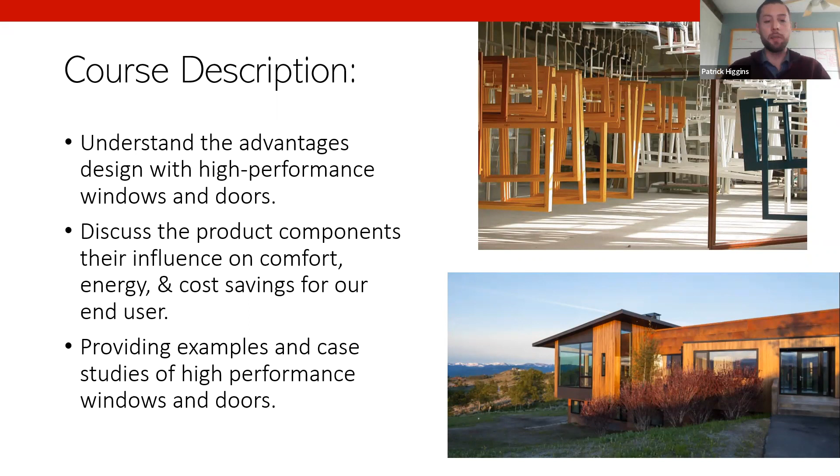All right, so today we're going to learn a couple of advantages of designing with a high performance window and door package. We're going to discuss and get into the nitty gritty of the components, how they influence comfort, energy, cost savings. And then we're going to finish up early with a couple of case studies, and we're going to take a look at some actual real life applications, some learning things that we had learned through our experience in installing and providing high performance products.

A couple of examples of some high performance projects that we have worked on, couple local, couple outside.

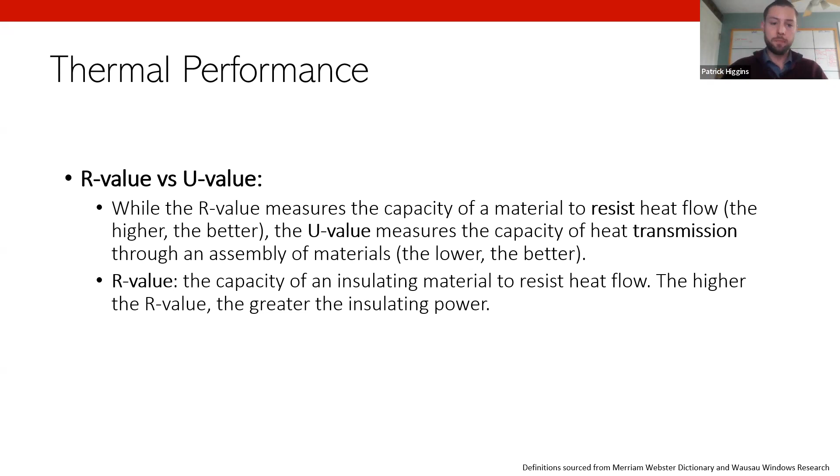Getting into high performance, the most bottom basic threshold that we can speak to is performance. So many people will be very familiar with an R value. Traditionally, when we're speaking about windows, we will use the term a U value. A U value is essentially the same as an R value. It's just inversed. So traditionally, we're used to an R value that is very high, being highly efficient. Conversely, a U value being very, very low will be higher efficiency. So the lower the U value, the less thermal transmission and the better that your product is going to be.

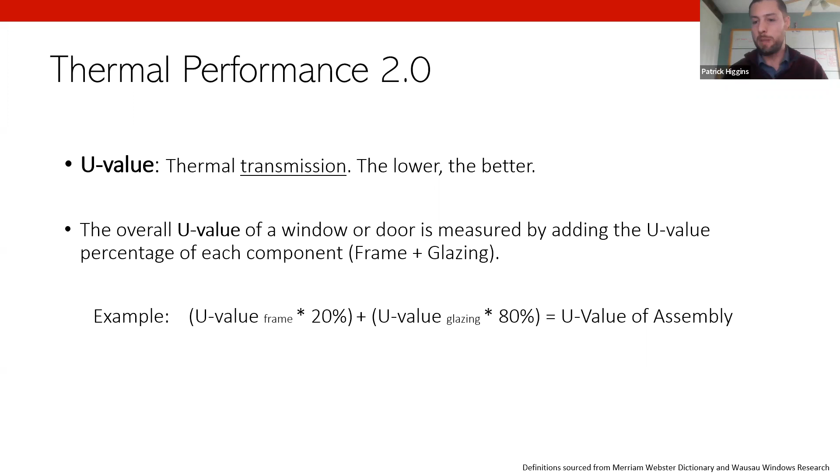There is a very simple mechanism to translate U value into R value, or conversely, R value into U value. If you would like to stay after the class, we can do some math exercises, and I'd be happy to go through that with you.

Getting into insulation and energy efficiency, I like this example. It's not a complete apples-to-apples comparison, but it gives a good idea of how an assembly that's almost identical can perform slightly differently. Looking at this red box, you see a fixed unit with grids and an operable unit with grids. The U value for the frame is exactly the same on both units, and the glazing unit and argon gap are exactly the same. However, due to the change in frame-to-glass ratio, the operable unit has more frame and the fixed has more glass, so the U value is slightly different. This indicates the glass is the higher performing part of this high performance window package, so the more glass you have, the higher performing your window or door will be.

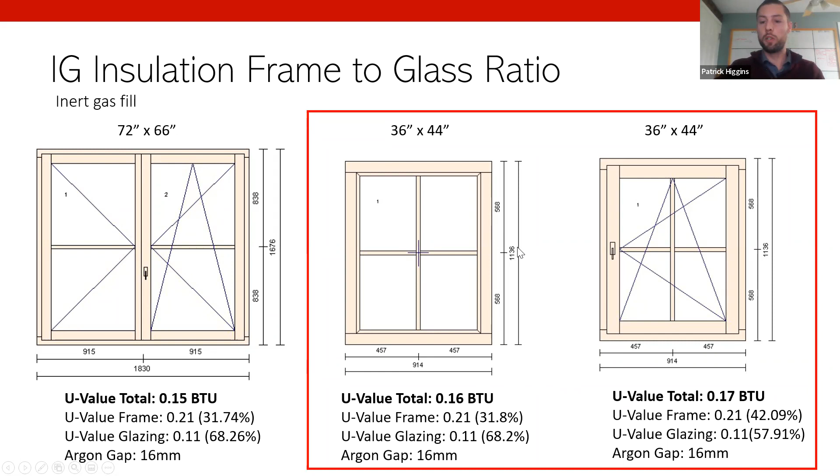Speaking more about glazing performance, I like this slide because we're all in New England, so we've seen single pane glass. Hopefully we're living in homes with double or triple pane glazing, but this is a neat and relatable application. In this instance, it's 14 degrees outside. With a single pane of glass separating outside and inside, right up against that glass it's about 29 degrees. With a double pane, still 14 degrees outside, it's about 48 degrees. With a triple pane, still 14 degrees outside, it's a comfortable 64 degrees. This assumes your thermostat is set at 69 to 70 degrees inside.

The reason I bring this up is that using a high energy efficient, high performing glass package not only saves on energy efficiency, but allows the occupants of your building to get the most out of their livable space. We've all been in a building with single pane glass or poor performing double pane glass, where you have a couch or seat right up next to the glass.

Some of you may work in an office with a single pane piece of glass, or old wood, iron, or steel windows, and that corner office is really cold. It's 14 degrees outside, you're in your office throwing on a sweatshirt or gloves because it's so cold in that space. It's not a functional space at that point - you're cold, it's drafty, and it's not a fun place to spend time.

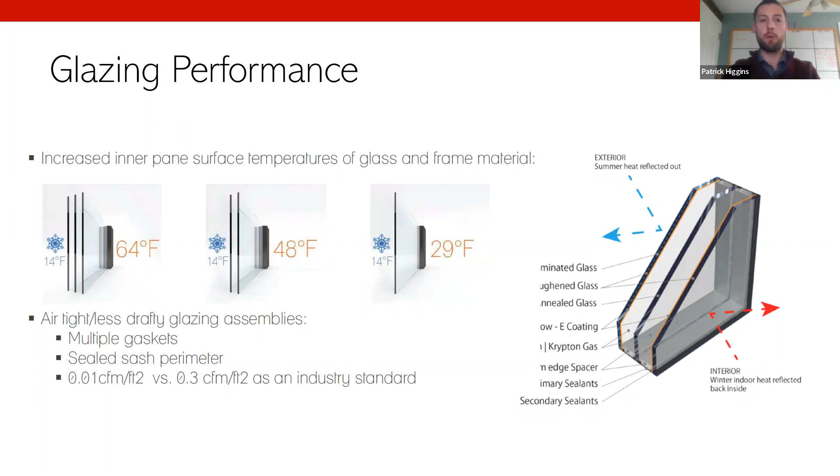Two things are happening here. Anytime you're within a room that has a temperature difference of 6 degrees or greater within that single room, you create what is called a convection loop.

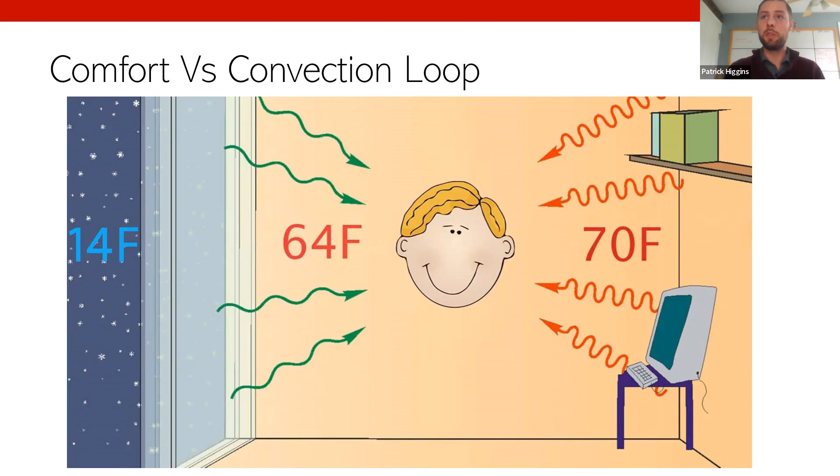So what I like to tell clients is design what you love to design. Design with your heart, and then let the professionals figure out the equation of how to balance it and make it energy efficient. We can still make a passive house or a very highly efficient building utilizing floor to ceiling window walls. We don't have to use the old 70% building siding and 30% glazing—we can now blend that into 50-50 or even greater with a high performance window and door package. So your design is basically whatever you can think of, and implementing a high performance window and door package can make that design a reality without sacrificing efficiency or comfortability.

This really exemplifies the fact that we don't have to sacrifice the design or glazing area for performance. If any of you would like to walk this project with me, I'm very happy to, and we can talk more about it in person.

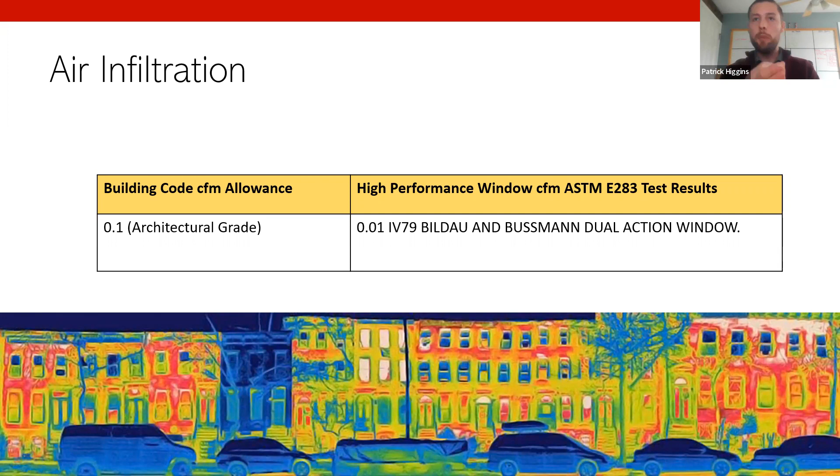We can also tell that these windows have been replaced because these are probably more modern double pane glazing, and keeping to the historical needs of the location, this is probably single pane glazing where they're red or even white. Very interesting. A thermal image can tell a tale that may not be seen by the naked eye. We can locate air infiltration, see high performance windows versus single and double pane windows, and see replacement windows all within one picture.

So speaking to air infiltration, the traditional North American view is using silicones or sealants to seal your building envelope, utilizing old school methods of Tyvek or Typar type building wraps. The future of high energy, high performance buildings and window fenestrations is using a vapor open, peel and stick applied facade - this goes more to a passive house type approach. That does a couple of things: one, it allows for very quick and easy quality control. Two, we've all seen and driven by construction sites where we see the Typar or Tyvek building wrap flapping in the breeze as it's tearing itself off the building.

So it ensures it sticks and stays on the building with a nice airtight seal. If we're utilizing a very high performance window and door package, we'd generally prefer to use a taping system. A taping system has been used in Europe for 50 to 70 years with proven results. In North America, we usually use sealants, which typically tend to crack and have to be replaced within 15 to 20 years - that's the usual life expectancy of a sealant. So not just speaking to air infiltration, but also to longevity of products we choose. If we can use a tape product, fast and easy to install, we can improve air infiltration while also reducing overall maintenance costs of the structure.

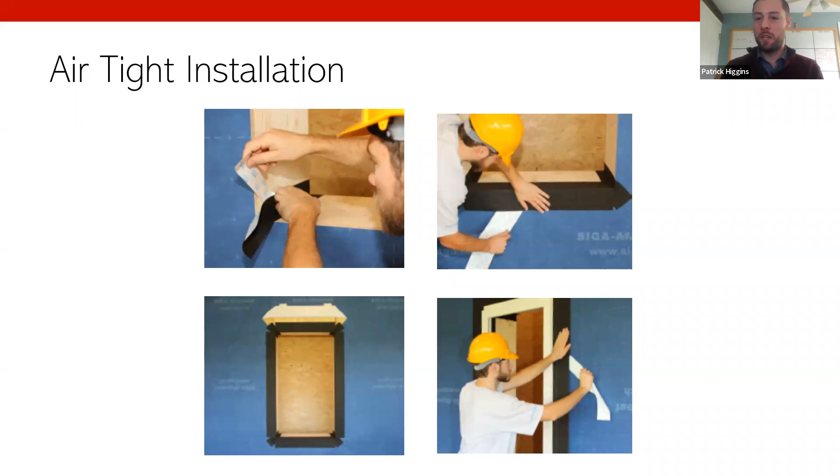So moving on a little bit from air infiltration, still speaking to a high performance window and door package. As I mentioned opening this presentation, my view of high performance windows and doors isn't just about energy efficiency, but also the comfortability of living in the structure. We've all been outside and had road work in front of our building, we've all heard jets or loud trucks rumble by our house. Part of having a high energy efficiency or high performance window package is eliminating air infiltration.

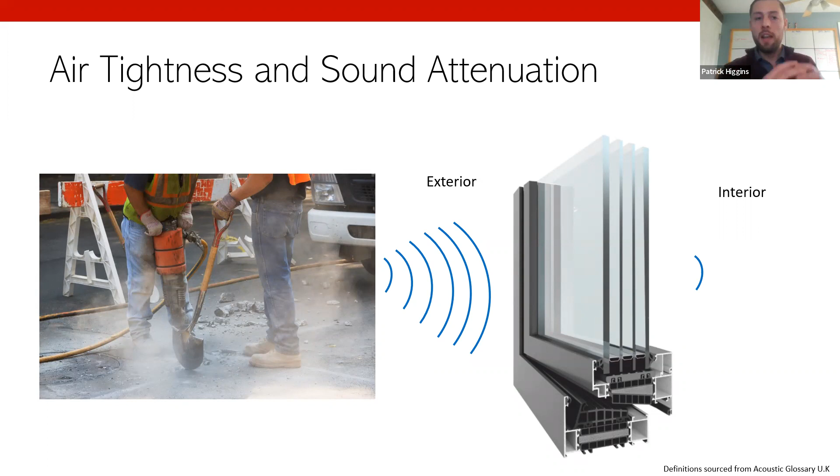Now, we had just spoken to air tightness and air infiltration being very, very low in these high performance packages. Sound travels exceptionally well through air. If we can eliminate air infiltration, we can very much reduce ambient noise from outside. So having these very airtight assemblies is a double win, so to speak - not only are you improving on energy efficiency and comfortability, but also reducing sound transmission at the same time.

There's two schools of thought when we're measuring sound: there's the STC value and there's the OITC value. They are both basically relaying the same exact information - some say tomato, some say tomato. Two methods of measuring sound, but still relaying the same information. The higher the value of your STC or OITC, the less sound infiltration.

Now, the main difference between an STC value and an OITC value is where they start measuring sound infiltration. Your STC value is an old school rating system designed in the mid 60s to measure things such as radios or televisions or other mechanical equipment. They start their measuring system at 125 hertz. The OITC system was designed to measure railroads, aircrafts, and lower type frequencies, starting at around 80 hertz. So your OITC value is a little bit better at relaying the information than the STC value. It was designed specifically for building practices, whereas the STC value was designed more for common use.

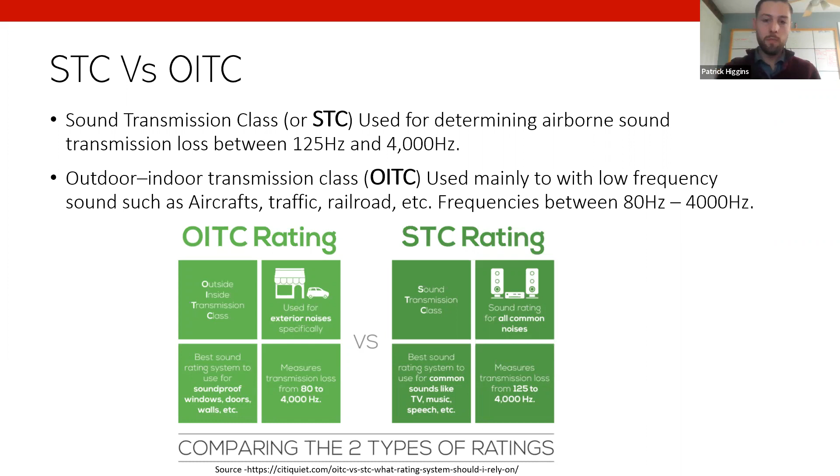Speaking to sound infiltration, we're going to open this up to a discussion. Three main sources of sound infiltration in the buildings we live in and occupy today: air traffic, rail traffic, and highway traffic.

I'm going to open it up, we'll go around the horn. I want everyone to give me an answer. I'm going to ask which one of these three do you believe is the most difficult sound to abate, meaning what is the most difficult sound for us to eliminate in our structure. I'll start with Alex because Alex is the one I can see.

I'm going to say air. Okay, do you have a reason? Just because it's really loud. Perfect, I'm not grilling you, I'm just asking because we're going to have an open discussion about this.

Chris. I'm going to go for highway because it's a lower decibel, it's lower frequency.

Okay Lisa, we'll just do a couple more, or if anyone else wants to jump in. This is Dre - I would say it's the rail traffic because it's intermittent, so it'll come rumbling along. I've run into this before.

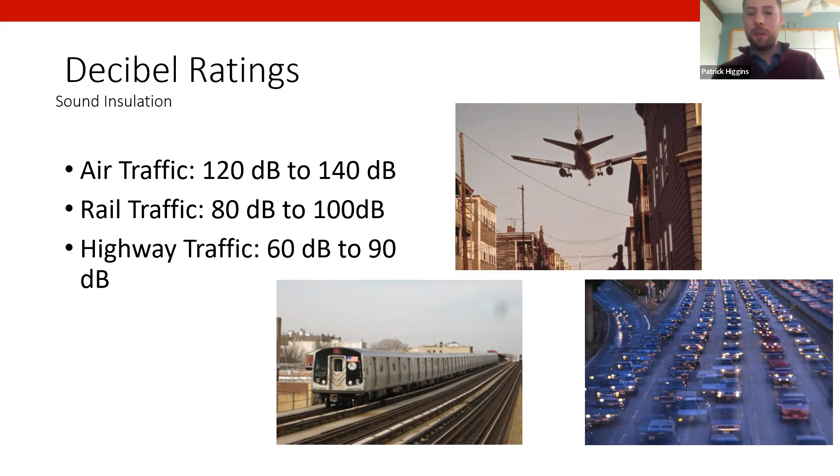So how can we add value to a property? We can simply reduce utility bills by utilizing a higher performing package. We can also maximize the living space by having a highly insulated window wall or window assembly, so you can maximize this entire structure for usage.

We can eliminate that air infiltration by using a very airtight window and door package. And as we just spoke to, we can keep those noise disruptions outside by eliminating air infiltration. So, all of the above can give you value to your structure by simply utilizing a high performance package.

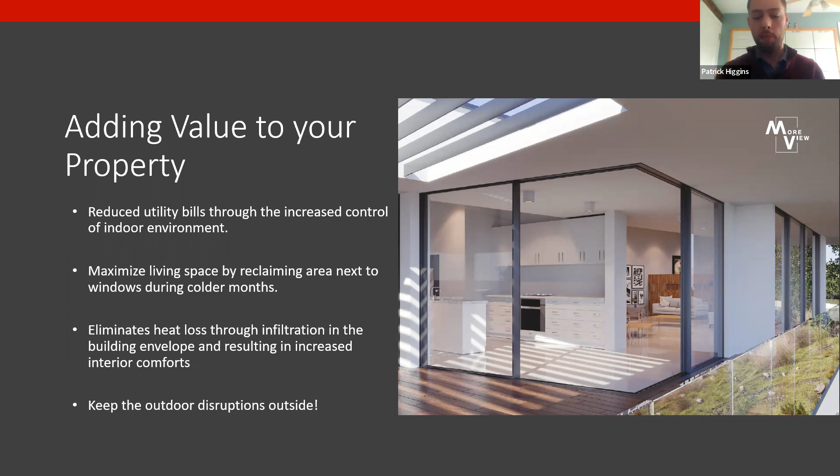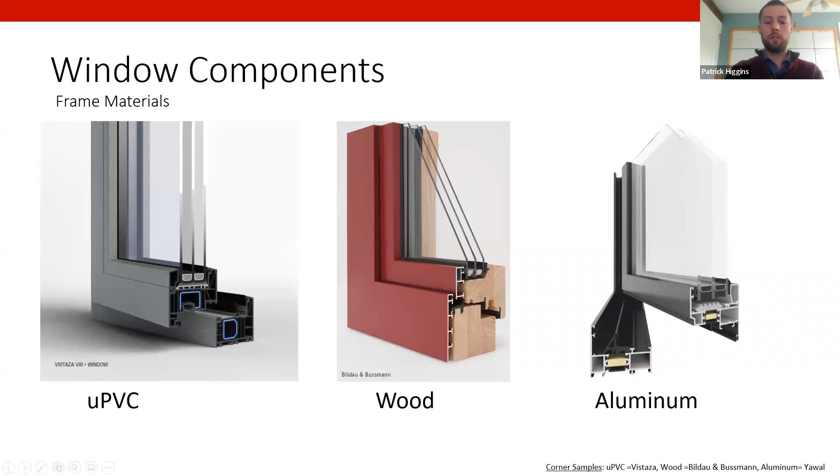A couple of examples of some high performance windows in this slide here.

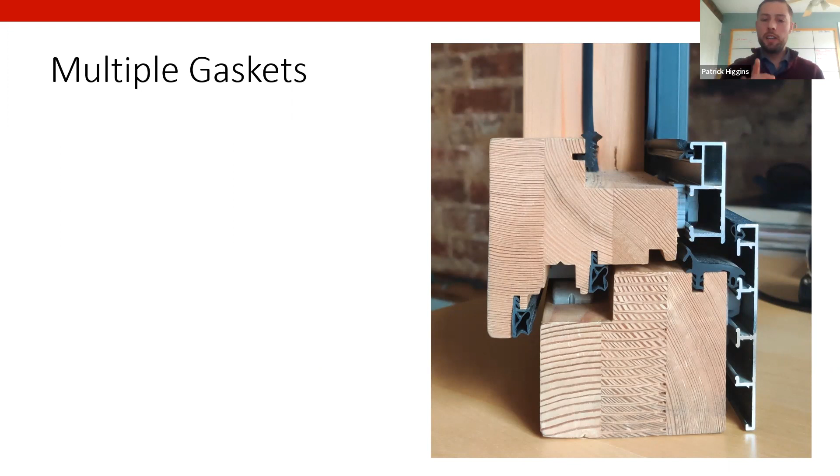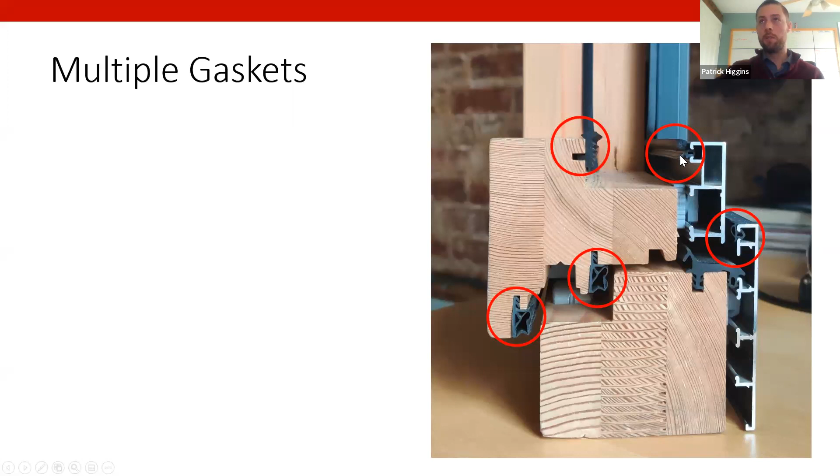To achieve high energy efficiency and very low air infiltration, as you can see in this slide, multiple gasketing systems will reduce airflow. In this particular instance, you have 1, 2, 3, and I'd argue even 4 EPDM rubber gaskets, eliminating air while also eliminating water infiltration. You may also notice you can have double gasketing in your glazing pocket, or if you choose, you can also put sealant in this location.

You may also notice in this picture on the right-hand side that we eliminate thermal bridging, or infiltration of unconditioned space. By alternating the grain of the wood in different directions, it makes it more difficult for ambient temperature to thermally transfer through this profile, simply by alternating wood grain.

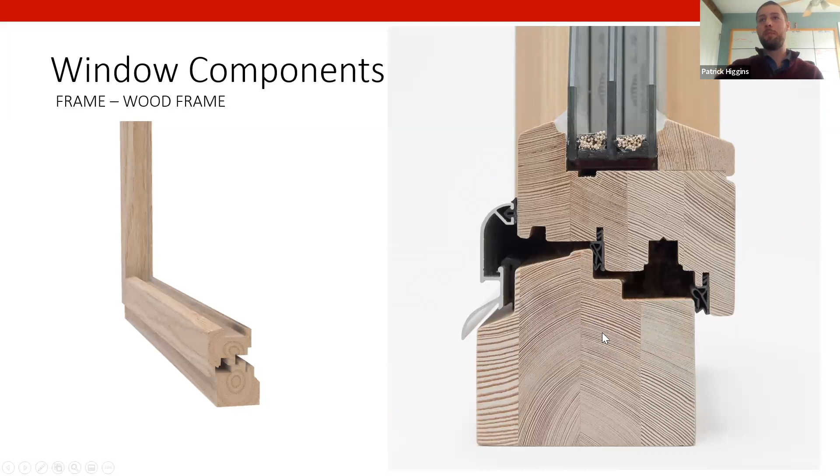Or if you're using an aluminum structure, you can use a thermal break, and we'll get to that a little bit later. So some of the components we use to get this high energy efficient window and door package is an insulated glazing unit.

We can use argon, the traditional method for insulating between the glass. Or if you're looking for something very high energy, we can also insert krypton, another noble gas that offers very high energy efficiency. I'll note that krypton's insulation property is much higher, but it also carries a much higher cost—it's a much more difficult natural material to manufacture.

We're also going to utilize what's called a warm Swiss edge spacer bar. This eliminates thermal bridging—thermal bridging being the transfer of ambient temperature from the exterior to the interior. Imagine a piece of aluminum, which we know is very thermally conductive—it will carry that cold or warm from outside through the glass, through the spacer bar, through the glass, and into your structure. If you're using a warm Swiss edge spacer, it's a composite material stuffed with desiccant.

Desiccant is a material you may find if you've purchased a new leather good, running sneakers, or other materials where they don't want water present. Desiccant will absorb water, and as it absorbs, it will also expand. So in this particular instance, you have a butyl surrounding this spacer bar, and if there is any air infiltration, there's always a small ambient amount of vapor in air, which will cause the desiccant to expand and thus self-heal this window.

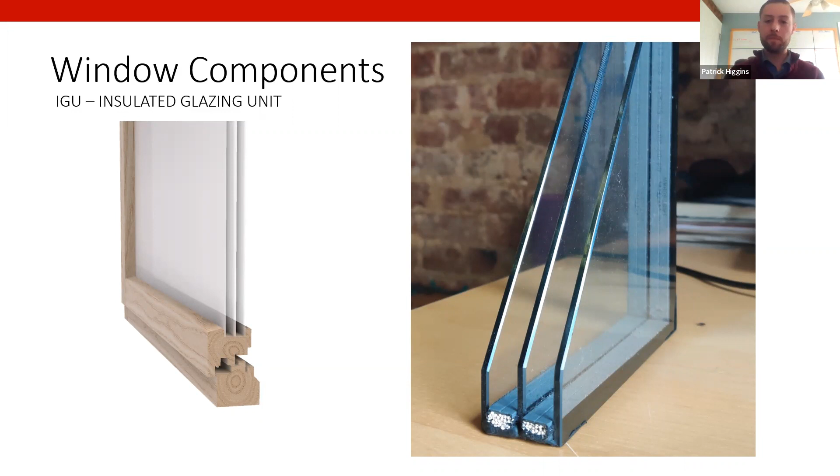So a couple of things we can utilize: low-E coatings, as I mentioned, argon and krypton gas fills. We can use low-E coatings to either take advantage of solar heat gain or to shade solar heat gain, depending upon how you build and design the heating and cooling loads of your structure. We can do this with tempered glass, laminated glass, or even specialty glazing, like a privacy glazing type, where you could flip a switch, add energy, and actually dim or cloud your piece of glass. We do have that technology available.

Utilizing a composite material for your spacer bar, not aluminum or stainless steel, although stainless steel does perform a little better than aluminum. But utilizing this high performance composite eliminates thermal bridging, and utilizing the desiccant with the butyl edge sealing reduces the amount of argon escaping from your window assembly.

So we have multiple uses. Not only can we do double pane, we can do triple pane. In some cases, I can even do quadruple pane if you're looking for hyper energy efficiency. We can also do triple pane with lamination, so if you're looking for impact resistance, ballistic resistance, or something like privacy glass, we're able to provide that and implement it into a high efficiency, high performing window and glass package.

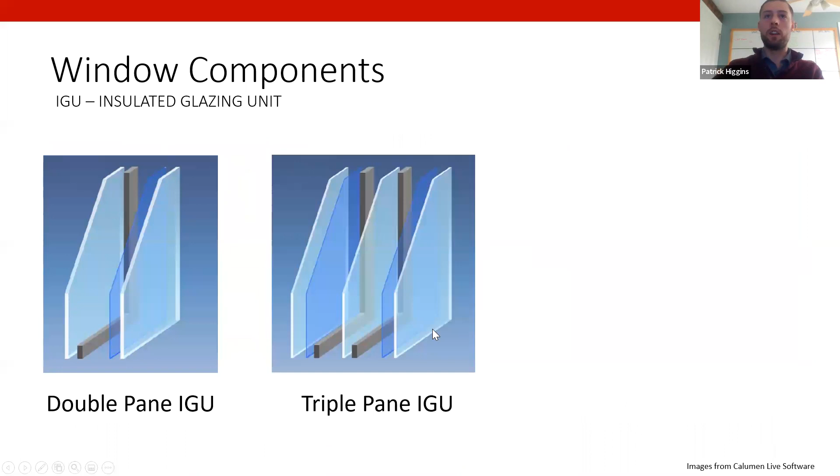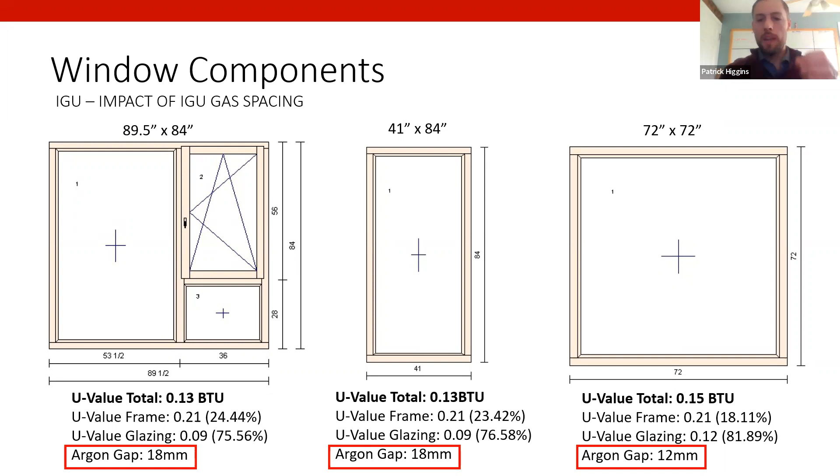So when I say thickness of your spacer bar, this unit right here, if you make it wider, that allows for more argon or insulation to go in. And that argon gap, the wider it is, the more insulation you can put in there and the more efficient your window can be. So without sacrificing design, without sacrificing maybe a wood species or the type of frame you're hoping to implement, you can play around with the spacing of the spacer bar, wider or narrower, to make a higher or lesser performing glass package. It's a way we can maintain design while also adding insulation value.

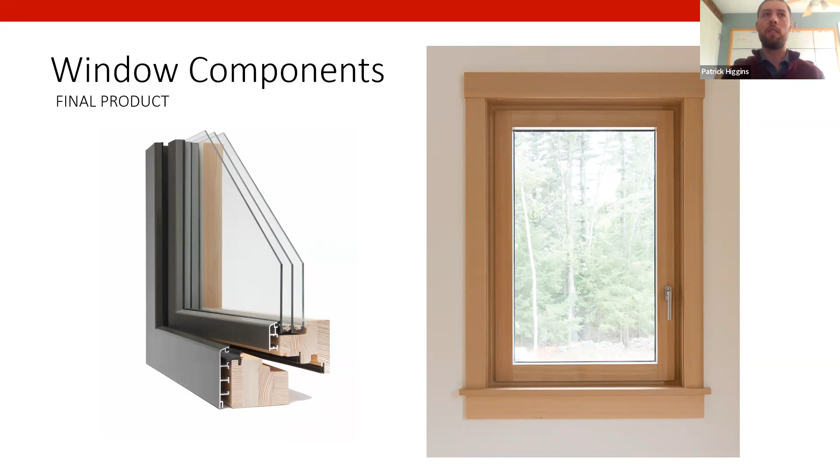So adding all of these components we're speaking to—multiple gaskets, triple pane glass, high energy efficient and thermal bridge free spacer bars—adding all of these together gives you one final product: a high energy, highly efficient window and door package.

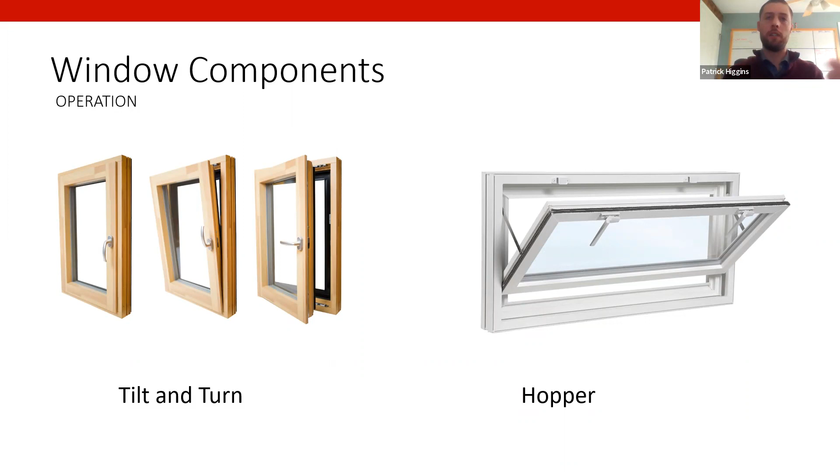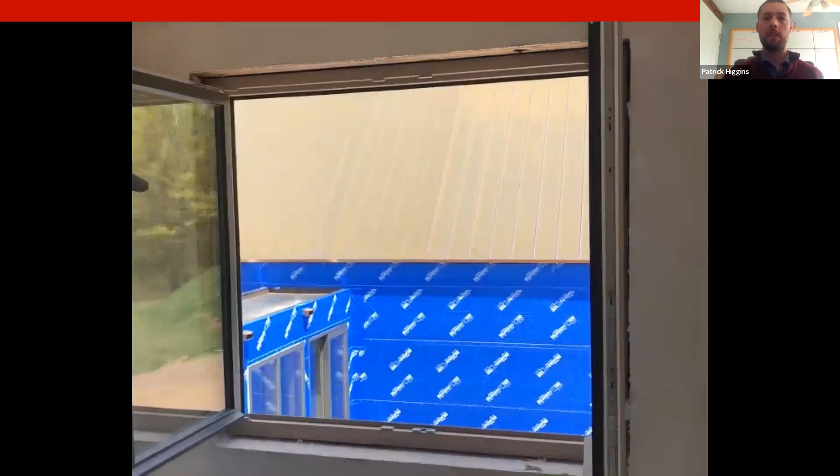And to tie it all together, as I mentioned, there's some Henry Blueskin, a high energy efficient building wrap, in the background.

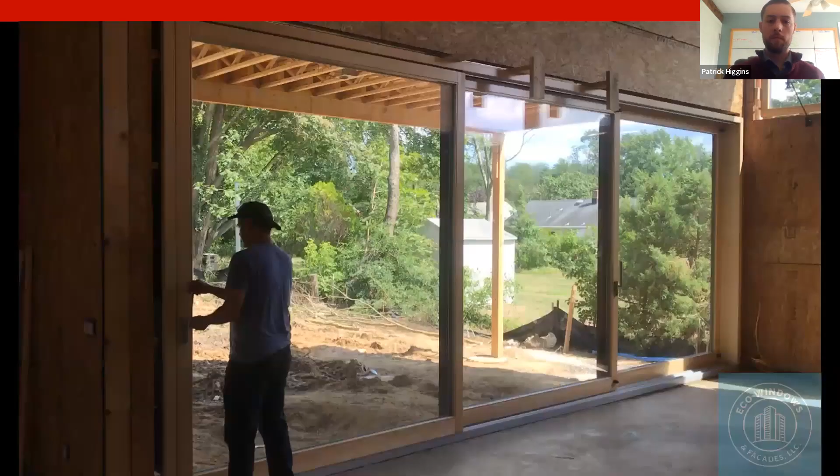As I spoke to earlier, we do not need to sacrifice design or the natural flow of your building to maintain a high performance building or window and door package. In this particular instance, you may notice this is a lift and slide 3-panel door. Two panels are operable. This door is 10 feet tall, 21 feet wide. Each one of those panels is triple pane glass, about 1,000 pounds per sash.

And now right there, Bart Betancourt, our principal and owner, is moving 2,000 pounds of glass very easily for a massively wide and open area that will be the future of this outside living patio. So I can't stress this enough: you can still design exactly how you want and still get an incredibly high performing building.

Hardware is very unique in these high performance windows and doors for two reasons. One, they have to support lots of weight, so stainless steel is almost always being used. That also gives you the double edge that you can utilize these in an ocean environment without worrying about corrosion.

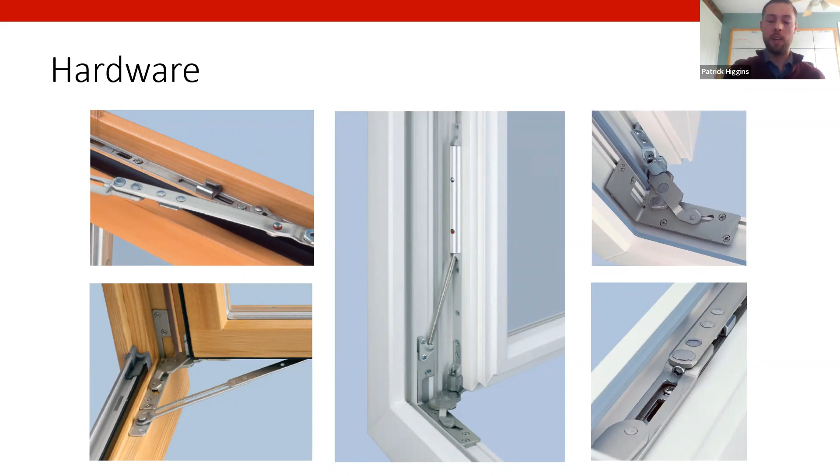Two, because we're looking for very high or very low air infiltration numbers, there are multiple points around this window that lock. Traditionally with a hung window, you have one, maybe two locking points at the meeting rail. With most of these tilt and turn windows, you'll have upwards of four and up to about twelve places where the window will actually lock and engage. That gives you much more security while also compressing the gasketing around the entire perimeter of the window, eliminating air infiltration. That's how we get those really high energy efficient numbers.

Lisa had asked this before we started, but it's worth noting that utilizing a high energy performing product, you don't have to stress about window treatments or blinds at the interior. There's always a solution, and we do offer these solutions as well. We can talk more after the AIA presentation, but even with a high performance window and door package, you can still have interior window and blind treatments that are very functional, with millions of different patterns and combinations.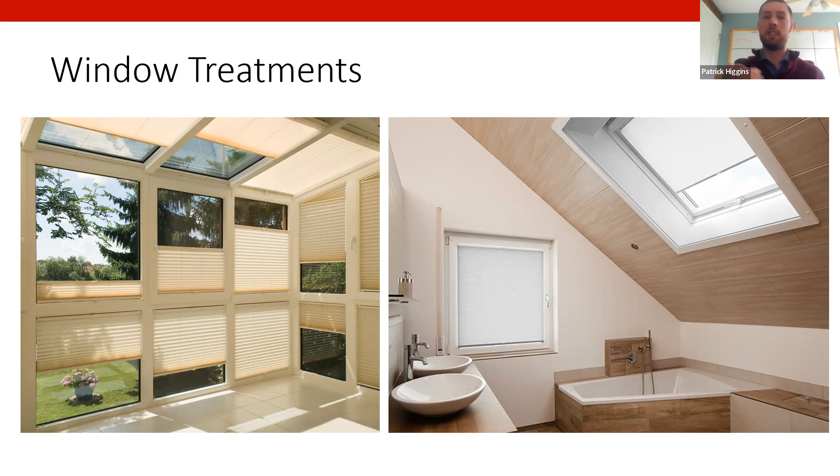Screens in Massachusetts are required for all operable windows, and with an in-swing type product, there's a small bit of logistics that have to happen for a screen. So there are many options: you can have a hinge screen, a snap-on screen from the exterior, a traditional type screen, or even a rolling screen, which seems to be very popular currently.

It gives a very high-end look. It's only engaged when you need it, so you have a clear glass opening. I work with a lot of architects, and as a side note, they always ask me, what is the visual transmission for your screen? I want to look through glass, I don't like seeing screen.

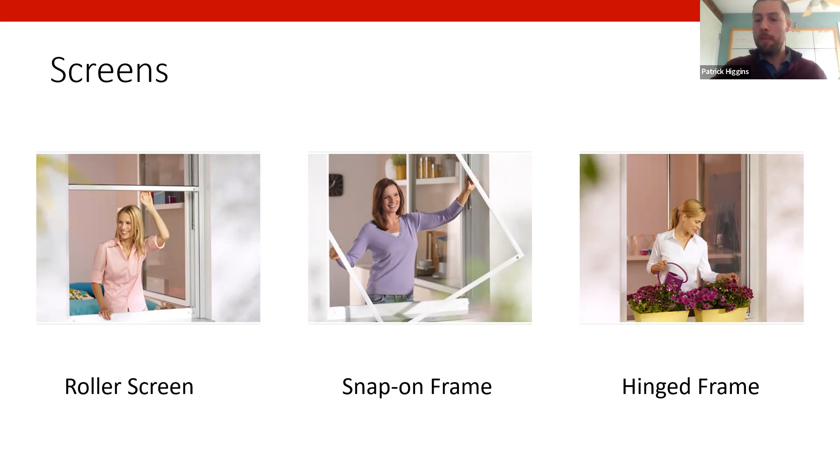The simple solution to that is using a rolling screen cartridge. It's a much higher end look. It can be automated if you want for very large floor to ceiling window and door assemblies, and it allows you to look just through glass all the time, unless your window or door is open, and then you can engage that roller screen.

We can also offer custom made screens for any application you're looking for, matching wood grains with your screen, or you can opt for a traditional aluminum screen.

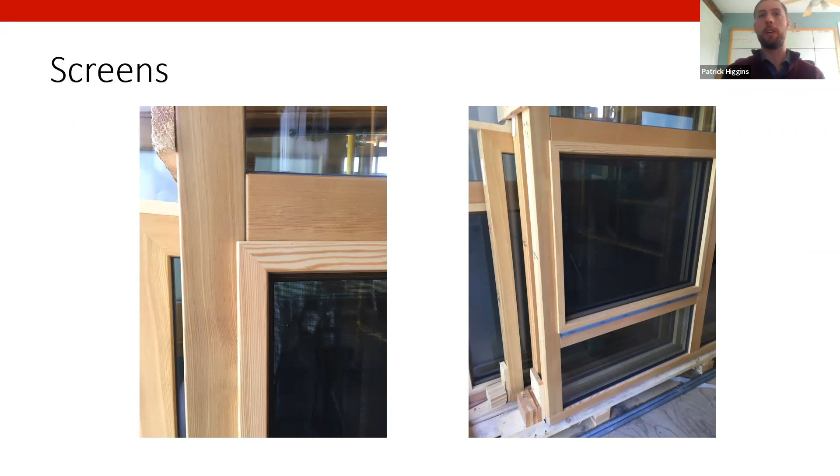Putting all these together gets you a really nice and beautiful final product, a high energy product, energy savings, comfortability, and a nice place to call home. Do I have any questions before I go into a couple of case studies?

A lot of times for renovations, I've heard that maybe triple pane is not really worth the cost. What is your assessment of that? Is it better suited for areas where sound attenuation is more of a goal?

That's a two-part question, so I'll answer the first part. That's a very old school methodology. The implementation of newer technologies allows for less cost delta between double and triple pane glazing. Personally, I see about a 5% difference from double pane to triple pane. When I look at 5% over an entire window package, that's extremely nominal considering the amount of energy savings you're going to get. I've done some personal case studies where I've seen about a 5 to 7 year return on investment in my projects, going from double pane to triple pane. It really becomes a non-starter.

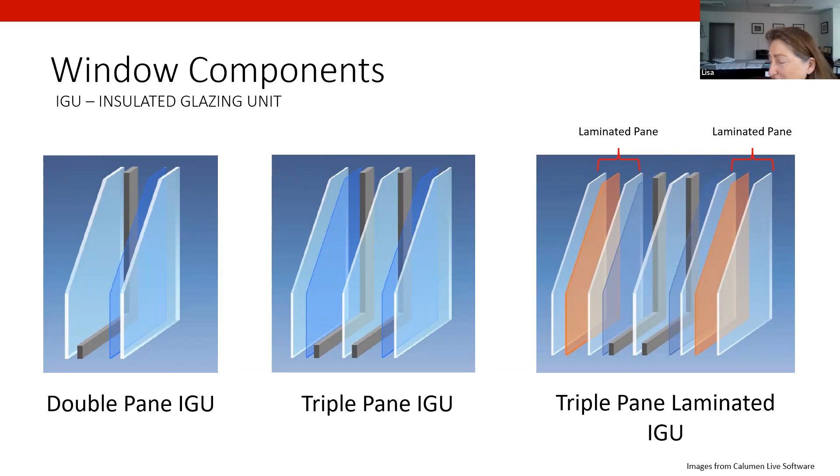A couple of things worth noting here. A high performance window and door package is only going to be as good as its installation. I like to draw the parallel between cars, I'm kind of a car guy. If you're a person that doesn't know how to drive a car or a race car, having a Ferrari probably isn't going to help you all that much. If you don't know how to drive a race car, there's no sense in owning one, right? So utilizing a high performance window is a two-part equation: not only the product itself, but also the installation, ensuring it's installed perfectly, as well as the attention to detail.

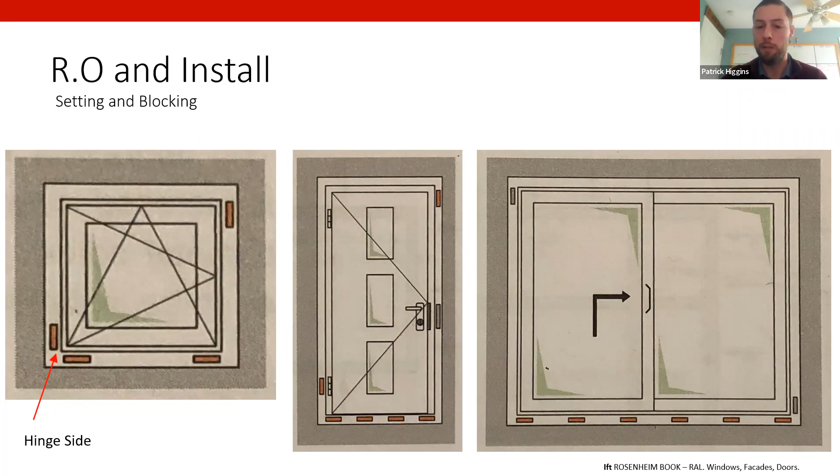We talked about, and Lisa brought up the point, building wraps and types of materials we use to waterproof and reduce air infiltration. Ensuring that we don't have air infiltration is a two-part equation: not only the performance of the product itself, but how we install it within the window cavity and the wall assembly itself. So ensuring we put the proper blocking in the proper locations, or shims in the proper locations, to ensure this window will properly function through its lifespan. Or ensuring that we tape the rough opening and make a nice location for our back taping to be taped to.

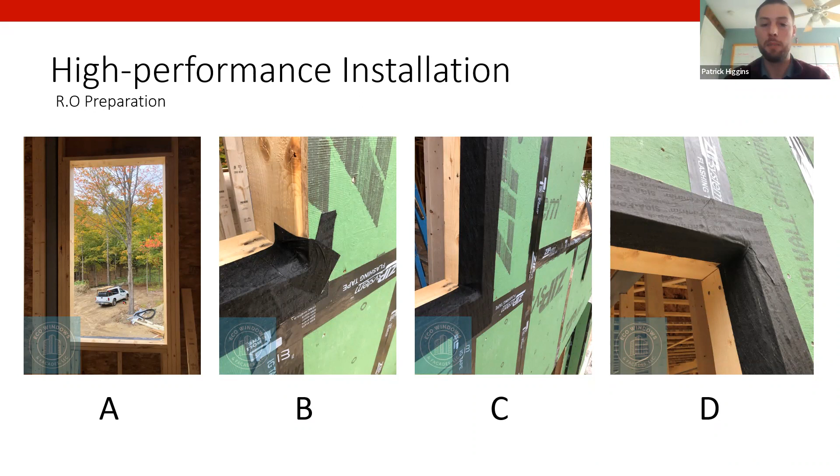Also ensuring that we fasten it properly so it doesn't rack, twist, or turn through its life expectancy. We always say, especially here at Eco Windows and Facades, that the details make a good project a great project.

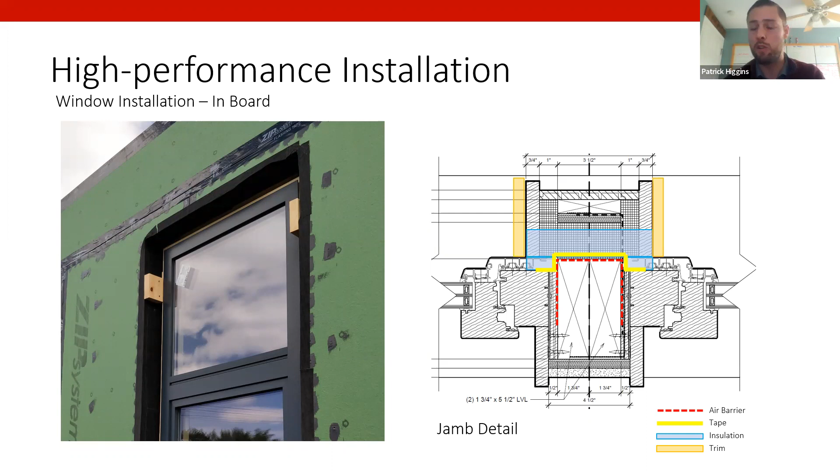Utilizing a high-performance installation method, making sure that we go through the details before we get out into the field. We don't want to have any surprises in the field, because that results in construction delays. So going through the detailing process is something we strive to do to make the best possible product.

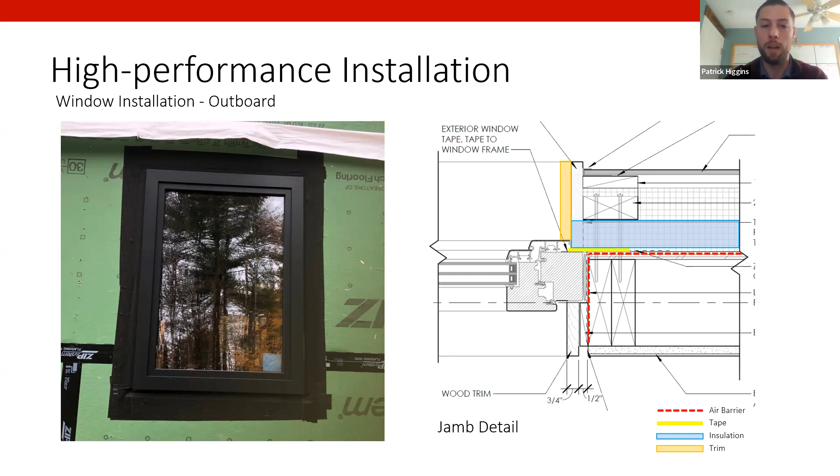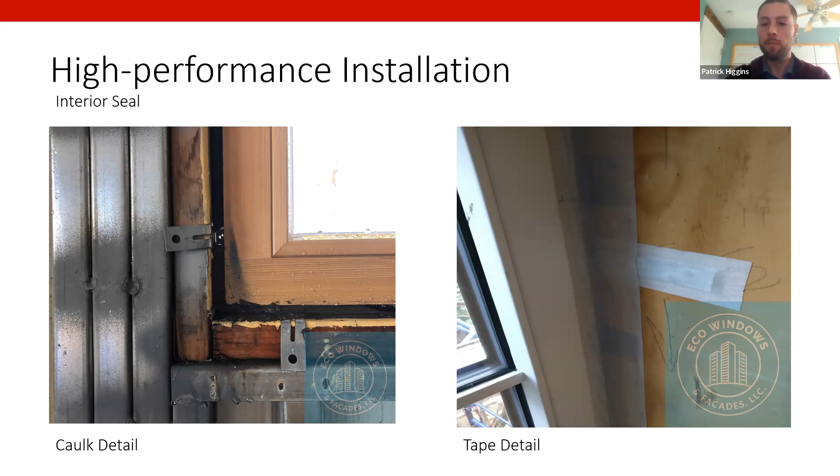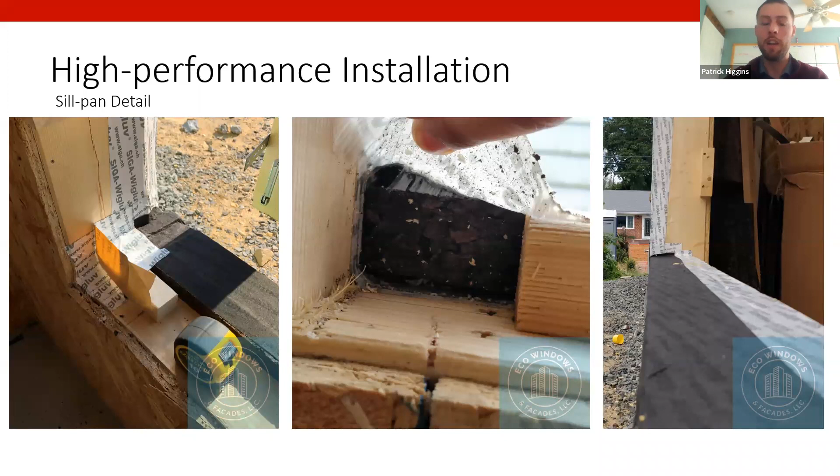Eliminating thermal bridging at sill details. Sill details are obviously where the most water infiltrates in a window assembly, so making sure the details are proper, and if you're going for a passive house, that you're eliminating thermal bridging by utilizing a minimal thermal bridge material—this is actually cork—for making a sill panning with your tapes. Really, details and prep ensure that your window is airtight and watertight.

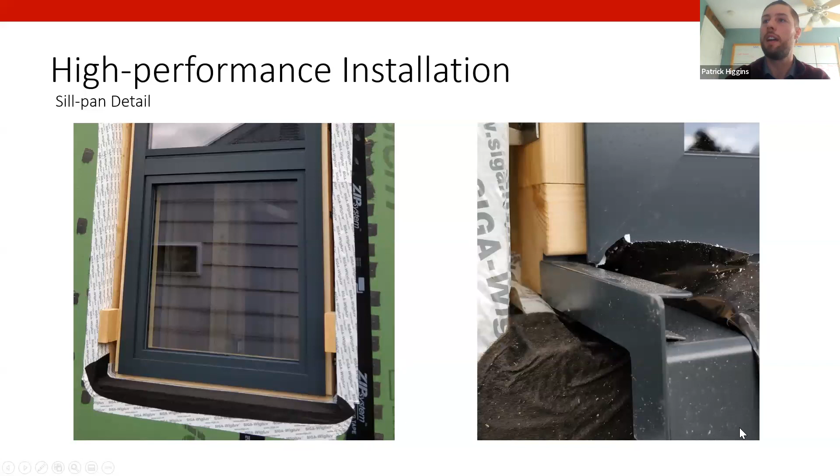You can also utilize sill panning details, such as you're seeing here, with a short cladding system. That allows for easier taping between your window and your facade, while also allowing water to drip off the face through the weeping system behind, and a clear pathway out through this sill pan detail. So again, it's all in the details—it's all how you detail it.

It's all about how to mitigate water and keep water away from your structure. This is your final detail of your sill pan. As I mentioned earlier, you can short-clad your system to allow integration of a sill pan—a great detail to use, full belts and suspenders.

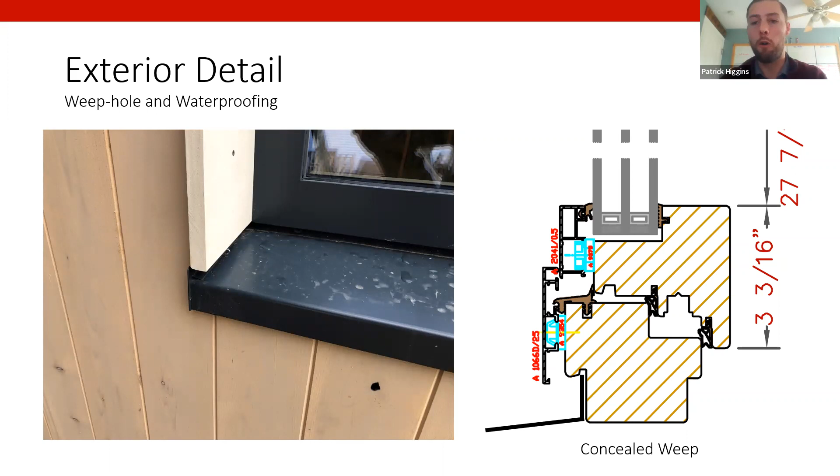Utilizing weeps where they're required. Right here is a spot where you need to get water out of a fenestration. You're going to use a weep system as opposed to allowing it to drip out the bottom if it's a multi-light assembly.

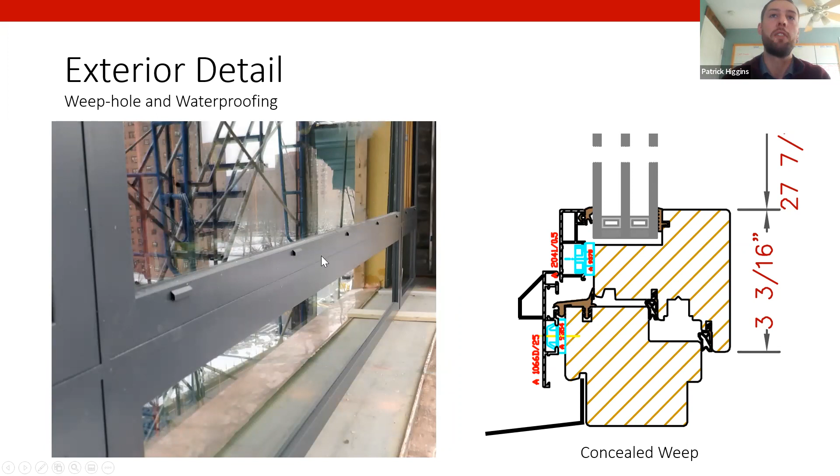One way you can achieve high energy efficiency is what we call over insulation, or wrapping your insulation over your frame. If you take your insulation and put it on top of your frame, you're adding more insulation value to the thinnest assembly in your wall cavity, improving your overall insulation. As we discussed earlier, your glazing unit is actually higher performing than your frame unit, so if you can wrap the frame with insulation, you can go a long way toward making a high performance structure.

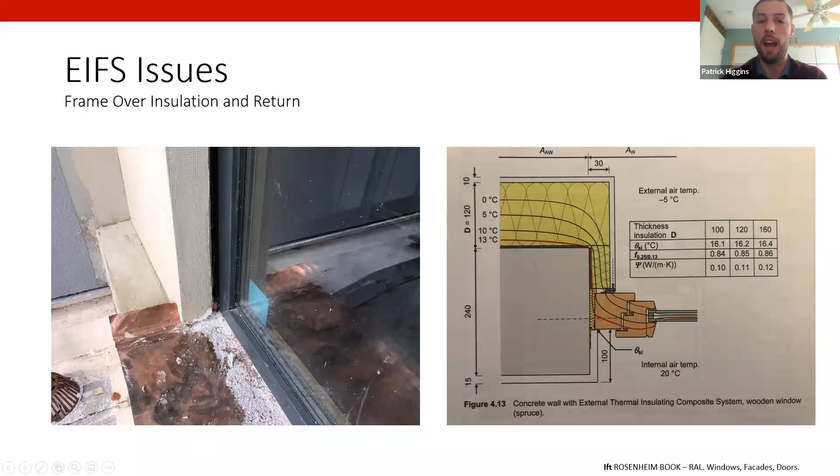On-site coordination is a huge part of what we do. As I mentioned, a good project is made into a great project by the simple details. If you need an ADA assisted opening system, you can have those. Making sure you're coordinating with your general contractors to ensure proper hardware and proper installation details of your window and door.

I'm going to share an example we worked on where there wasn't great coordination with the general contractor. This is a zero threshold door, and I'm going to show you what happens.

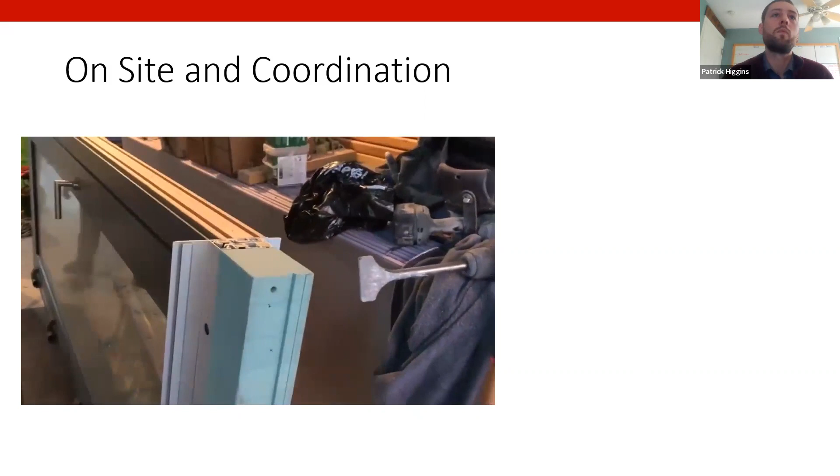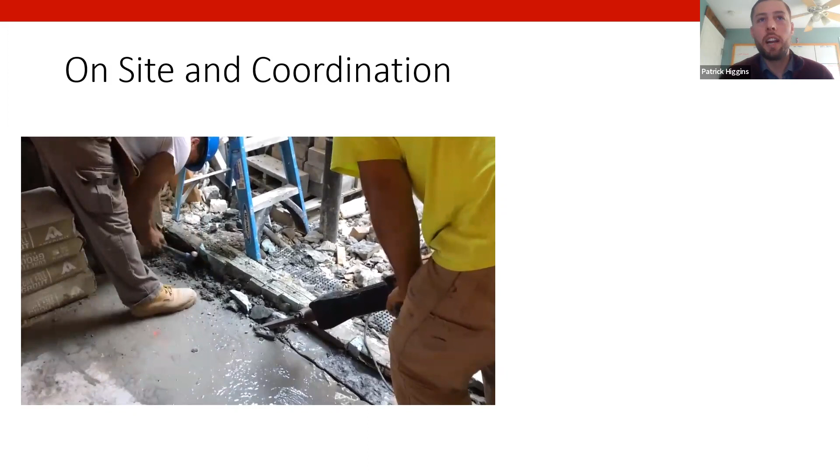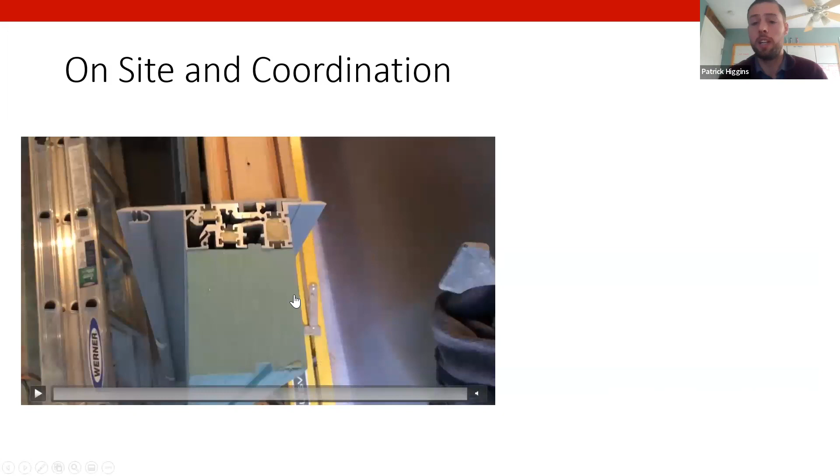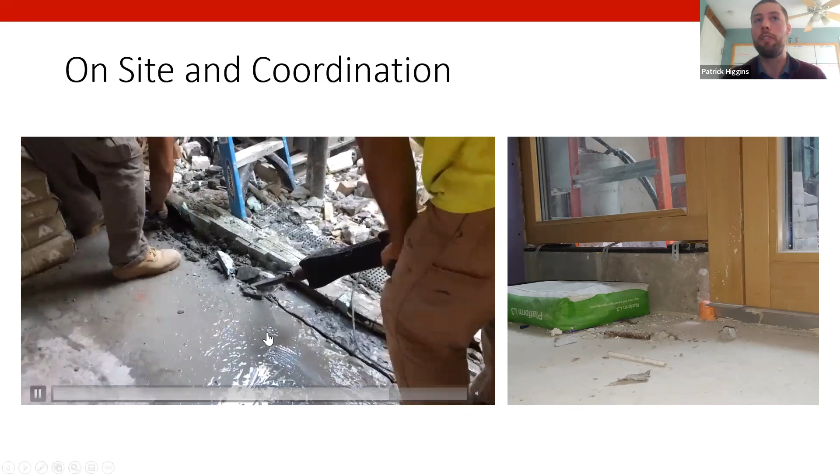A fully compliant ADA door has to have zero threshold. Without on-site coordination, the foundation was poured, and they did not coordinate with us to understand that they needed to set this door into the foundation. This resulted in a day of jackhammering. At the end of the day, it ended up being installed properly and it looked fine, but it was a step that wasn't needed. Ensuring that we pay attention to the details, with close communication between architect, general contractor, and supplier, means we don't have to have these oopses, and we can get it right the first time.

I know Lisa had asked me about this. A lot of people need to have a landmark approval or a historic approval. I have a project with the National Park Service where it needs to be replicated exactly as it was seen from the 1800s to today. It's worth noting that we don't have to go back to the 1800s and use old technology to keep the same look. Single pane glass, we don't have to use anymore. We can use triple pane glass and a super high energy efficient passive house structure while still maintaining the look of this historic residence.

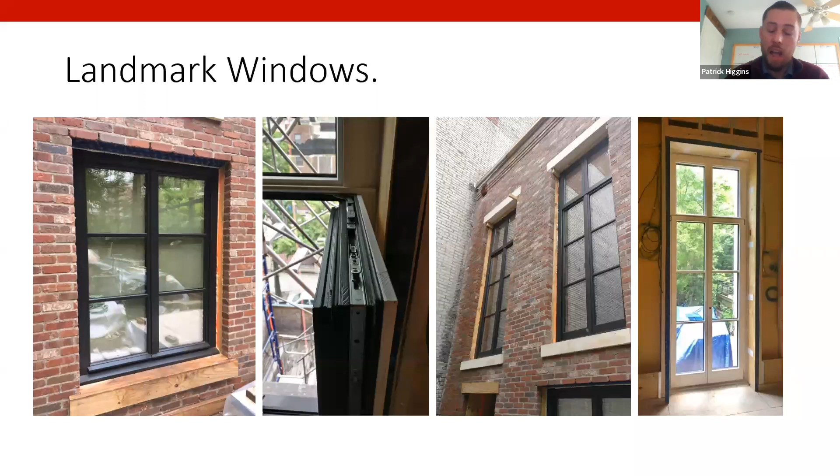As you can see here, these windows are almost identical to the ones that were there. However, they are airtight, they reduce sound, and they are now a fully passive house structure without having to go back to those old school methods and methodologies that are inefficient.

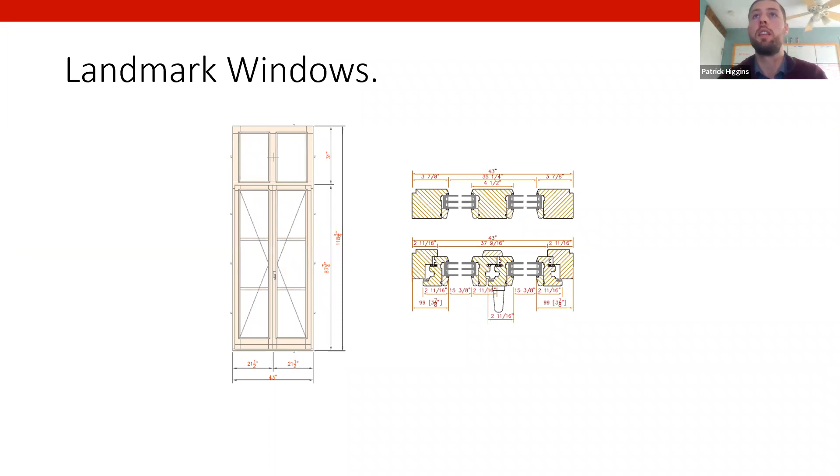The ability to replicate something that's old - this right here is a triple pane glass, a curved operable window. This is a project we did in the Bronx that required landmark approval, and it needed to maintain an operable sash. It needed to have curved glass, and the client wanted a passive house. They wanted the comfort and the energy efficiency, and it's worth noting that can still be achieved. We don't have to go back to old school methods, sacrificing performance to keep that historic look. Some of the cuts we did, we provided to the Historic Society to ensure we got the muntins correctly, ensure the radius was correct, and ensure we maintained the sight lines.

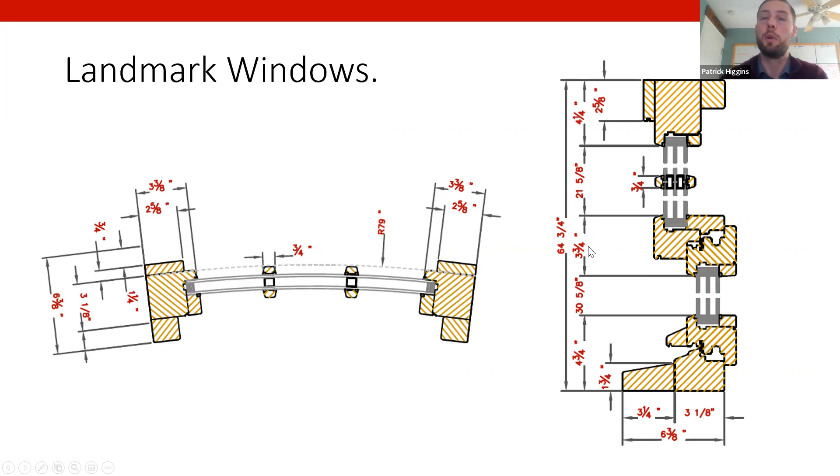I want to thank you all for your time today. I understand that time is the number one thing we all have a finite amount of. It is the most invaluable thing, and I appreciate your time today. If you have any questions, I'm happy to take them right now, or please email me or reach out directly, and I'd be happy to assist you in any of your projects.

Thank you, Patrick. Thank you, Patrick. Thank you.